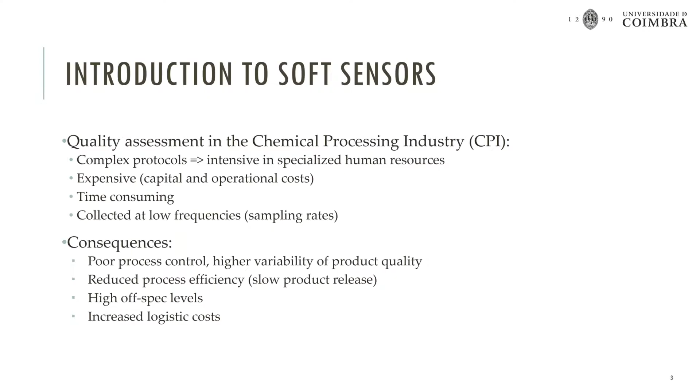You have, of course, a higher risk to have off-spec products, and there is also sometimes a hidden logistic cost that is tremendous, because until you know what to do with your streams, you have to put them in very, very large vessels, and that is something that costs a lot of money. And also you have to have those vessels, which is really very costly. So there are all the motivations to make these measurements available as much as possible in real time.

So what you do is to build models to predict those variables. And these models in the end are implemented in pieces of software or code, so they call them soft sensors. It's not really a physical sensor, it's a model implemented in software. So you can build a model like that using first principles, or mechanistic models, as we can also call them, or you can use the data that you have, and they are data driven. Or, and today this is becoming more and more used, you can use all the things that you can bring to the model, and you have a hybrid approach, first principles and data driven all together.

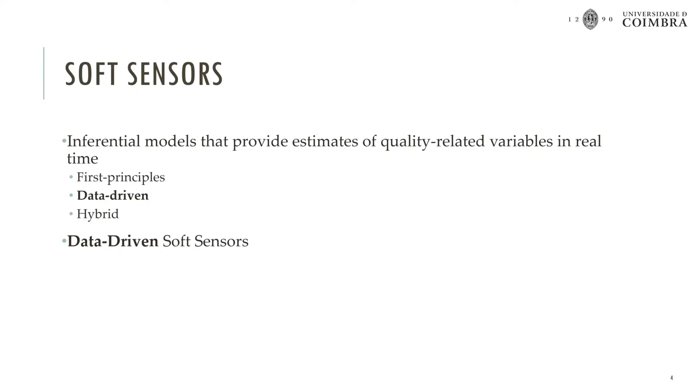So in this talk, we are going to address mostly the data-driven soft sensors. But even in the data-driven soft sensors, you can have different categories. And most often, you are probably using just industrial data that you can quickly grab from your databases, like the sensors for pressure, temperature, flow rates. They are quite easy to collect. Even measurements like pH and conductivity and others that nowadays are also quite handy. So one type of soft sensor is to build models from this easily obtainable data in order to predict your response, your property of interest.

Other types of soft sensors start not from the data that is already available, but from data that can be collected using specific technological instrumentation like NIR, Raman, and other types of technologies.

We call it in general process analytical technologies. And to use that data, those spectra that you collect from these devices, to build the sensors that you need to predict your properties. So these are like another type of sensor, but usually you need technology for that, but we also need a very good model in order to correlate the outputs from the technology with your desired output, which is your quality response.

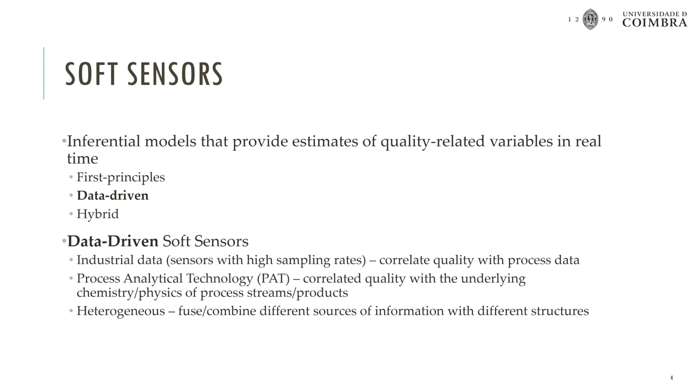And I will also address ways of combining both types of soft sensors. So the goal is to present case studies, real case studies, where you can put forward these 3 different ways of building soft sensors. And in the meantime, I will try to bring some relevant aspects that you have to take into account while you are addressing each type of soft sensors.

And hopefully, in the end, I will also give you some feedback on things that are currently being considered as interesting topics for research. Some of them are still open, but for sure, I think they will deserve more efforts in the future in order to be properly addressed.

So the first case study regards industrial soft sensors, and by this I mean using data that is readily available from the database. So here we want to predict RON in a reforming unit. So RON is the research octane number. I'll in a minute say what it is more specifically.

But a reforming unit is basically one part of a big refinery where you convert the naphtha into something with more value. Basically naphtha is composed by linear paraffinic hydrocarbons, and they don't burn too well in the motor. So what you want to do is to put more branched hydrocarbons there, and also some more aromatics. And you can do that in this unit, the reforming unit.

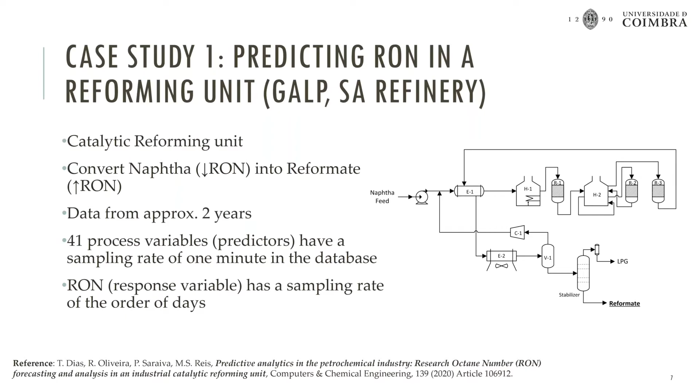So in this process, we analyze 41 variables, just process variables, over almost 2 years of production. And RON is measured following the usual standards, the ASTM standards, using a combustion fuel research engine that is calibrated. But this is really a complex way of measuring the properties, and so this is only done a few times per week. So this is, as you can imagine, a massive facility, but the outputs are not all available with the frequency that we would like. So there is a big driver for having this property being estimated.

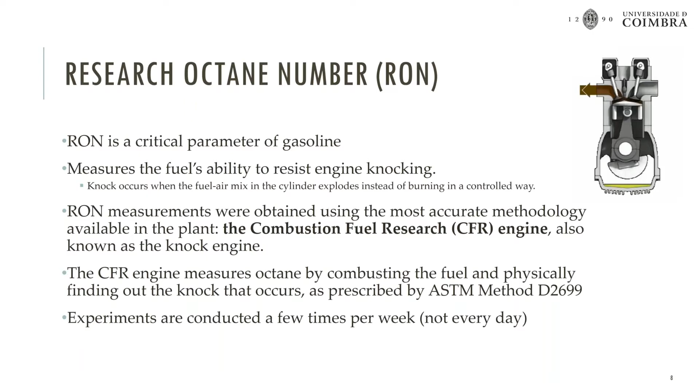So what we have done is we have collected data. As you can imagine, in process data, you have to do a lot of preprocessing. You have to remove all the periods where the process was down. There are a lot of outliers that are nonsense, and you have to filter them out, because it's just things that happen in the sensors locally. And you also have to be careful, because you don't want to remove others that look like those and are really not outliers or faulty.

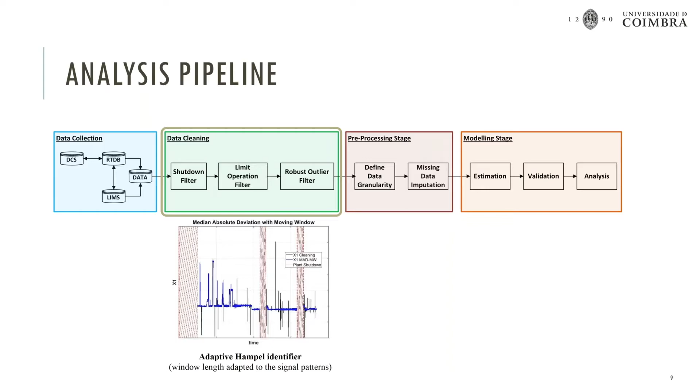So you have to tune these filtering operations very well, and you should not rely on blind ways of removing outliers, because you might be throwing away also very useful information. So we use here banks of adaptive filters, and then we always visually confirm that they were doing what they should. Another preprocessing stage that is important is where you define your granularity, because most of the times the data doesn't have the granularity that you need for your purpose.

So if you use here the Ron Kenett and Shmueli approach of InfoQ, what you want in the end is to generate as much quality of information as possible. And that means that you have to get the correct data, apply the correct algorithm, given the goal. And here our goal, I didn't mention that before, was we want to study the catalyst deactivation over time. And that might take years.

So for this particular goal, being able to predict RON on a daily basis is more than enough. So we set the resolution to the day. And that's always goal dependent. For other purposes, we might use a different resolution. But for our goal, the daily resolution was enough.

And of course, you also still have some missing data to handle. And here, for missing data, you usually resort to methods that explore some sort of redundancy in your data sets, either in the variables or in the time. And in this case, there is a lot of autocorrelation, because these are really massive units and you are sampling them so fast. So we mostly do interpolation here to fill out the missing data that we need to build a more stable model. And that usually takes a lot of time, and the 80% of time principle also applies here.

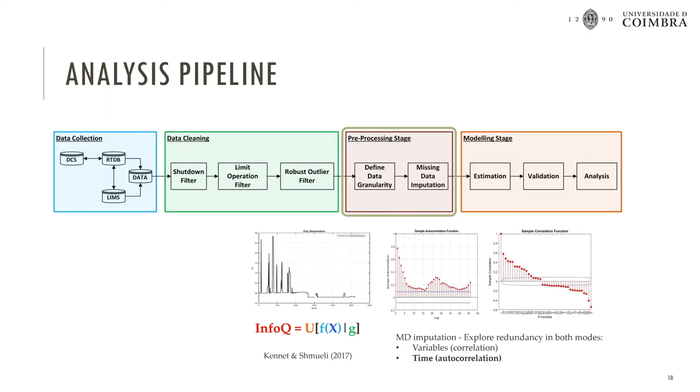But most of the time when you talk about soft sensors, you just focus on the modeling stage. That's what is now being discussed. And when you get to the modeling stage, quite often people apply their favorite predictive methods, or sometimes they have a favorite set of tools that they apply here. And what we have been learning is that we should be agnostic when we really don't have much information about which models to apply.

So what we have done here was to develop a tool that explores different corners of the analytics domain. So we assemble a selection of different categories of methods, including variable selection methods, penalized regression methods like lasso, elastic net, ridge regression, latent variable methods like PCR, PLS, and also tree-based ensemble methods, like random forest, boosting, bagging. The first three categories are mostly for linear processes, and the fourth one addresses nonlinear processes. And this will also be our way of knowing if some nonlinearity is present, because if it is, then we should bring in more nonlinear methods that are not here.

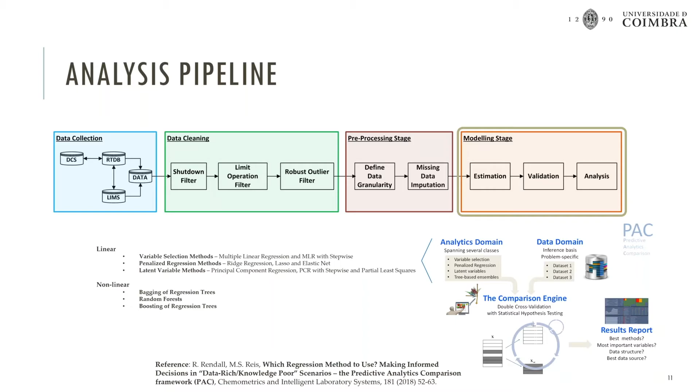So we built a framework that basically compares all these methods with the data sets that we provided, and we use a double cross-validation approach that was robust enough, and then we analyze all the results and compare them. And in this case, what we got was that the tree ensemble methods were clearly the best. We were not foreseeing that, because we thought linear methods would perform better, since this was supposed to be well controlled, and it is well controlled, but still there is some nonlinearity there. And you can see that we can achieve prediction accuracies of the order of 0.4.

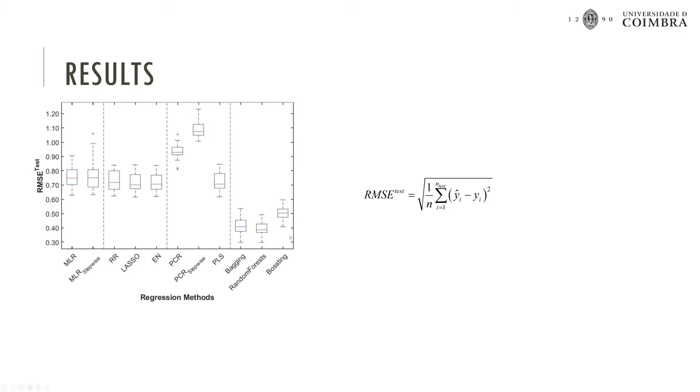And the kind of methods that we apply allow us to see which method performs better. In this case, it was random forest. And there are reasons for that, but I will not have time to cover it here. So basically, we can predict with a 0.4 accuracy, which when we compare with the literature is well placed, but not the state of the art. There is one that could be better than ours, but that used much less data than we did, so I don't know if it is really comparable. But this is fine for the purposes of studying the activation process over years. And the 0.92 R square on prediction is not bad at all for this kind of application in industry.

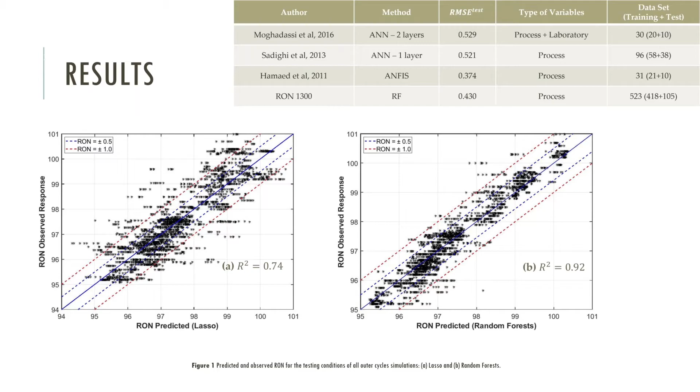Okay, so one thing we can also do with these soft sensors is look at the variables and see which are the most important or not, and try to pull some information from that. We'll not cover this here, but clearly the pressure and the reactor variables are the more important ones, and that is not a surprise, but then we have to know which reactor variables are playing a role, and that might be something interesting. So this is one type of sensors, the sensors based on process data.

So let's now address the PAT soft sensors, the Process Analytical Technology soft sensors. And here, what you want to do is pick a sample from the stream whose properties you want to estimate, and you go and measure what you want in the labs. So this is the complex, time-consuming measurement.

But in this approach, you are going to explore the connection between the chemistry in the stream and your property. If you also can connect and relate that chemistry with some measurement from a device, then you can correlate that measurement with the property immediately.

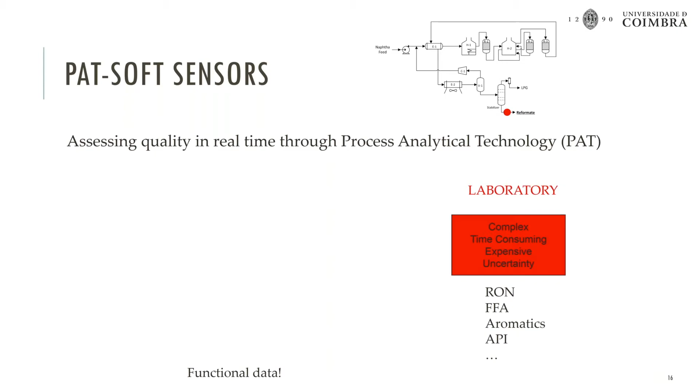So here we are going to use spectroscopic measurements. Spectroscopic measurements are basically measurements that are very sensitive to detect changes in the light absorption in certain frequency bands. So that has to do with the chemistry. So if you can find a measurement, NIR, FTIR, NMR, something that correlates with the chemistry of your stream, and that particular chemistry of your stream is also correlated with your property, then you can build an inferential model and use this easy, fast, and inexpensive measurement to predict your property.

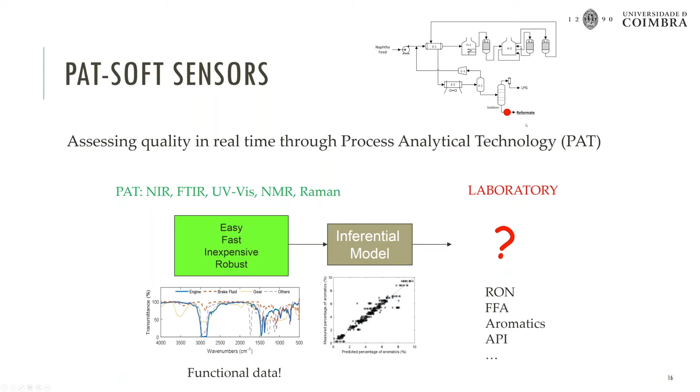That's basically what you want to do here. You don't want to use all the other variables, but just a sample that you take there and inject into one of these technologies, the one that fits your purposes better, and then you use it to predict your response. So here your inputs are something like this. So basically they are functionals. So now, yes, now we are in the realm of functional analysis, but that is something that is only recently being brought to this field. And usually we use latent variable methods to address this.

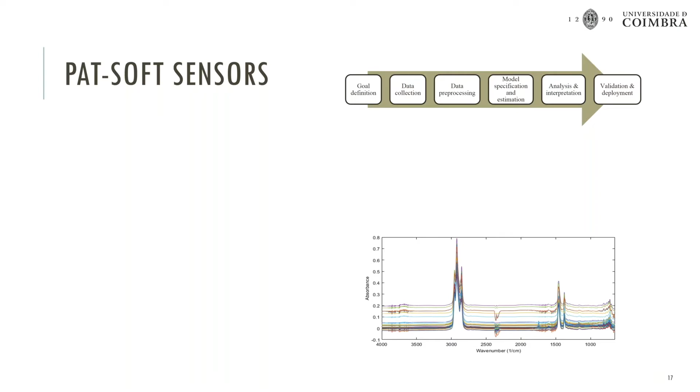And what I want to bring here is that what is very, very important is the preprocessing that you do with your spectra. So you have to do a lot of preprocessing to remove noise, but also to remove undesirable effects. For instance, these different levels are meaningless. They should be the same. They just happen because there are effects like light scattering that are making this happen. So if you apply in this case, for instance, the first derivative, this will be gone. So you should do this type of data processing here. And we also should do preprocessing to bring out the features that you really want for predicting your response.

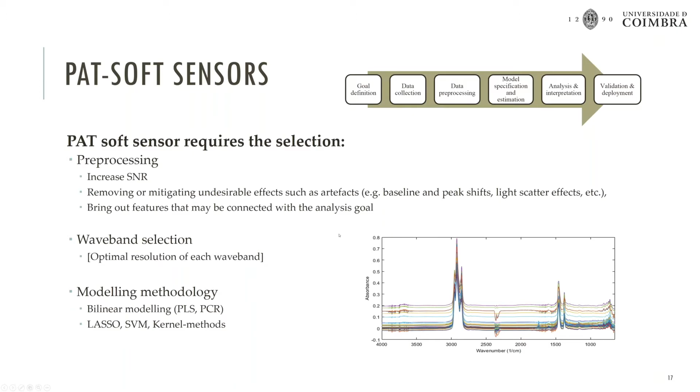So we have to test different preprocessing, and we also have to select the most meaningful bands, because if you just have bands that are not related to the response, they will hurt your model. So you have to do band selection. And you might try different modeling procedures also. So there are all sorts of different problems that you have to address in this case in order to develop a better model. So I don't have time to go into too much detail, but here we also developed a framework that allows us to speed up this process.

You can have different types of models, for instance, partial least squares, which is a sort of gold standard for developing this type of PAT-based soft sensors. But you can also use some other PLS-based approaches, like forward interval and backward interval partial least squares, that allow you to select the bands simultaneously with the model building, which is nice. And we have developed another method, which we call multi-resolution soft sensors, that allows you to select the bands and also to optimize the resolution within each band.

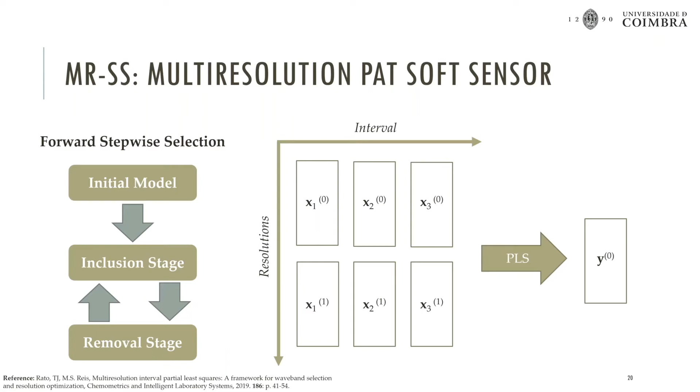And our framework tests all these methods with different sorts of preprocessing. And this is basically the multi-resolution soft sensor. So it tests all these methods with different types of preprocessing. And again, we're using double cross-validation. What we also do here is we test all of them in an independent test set. And we also do replications in the test set, because you want to know how they behave, not in a single test set, but in a test set with some variability.

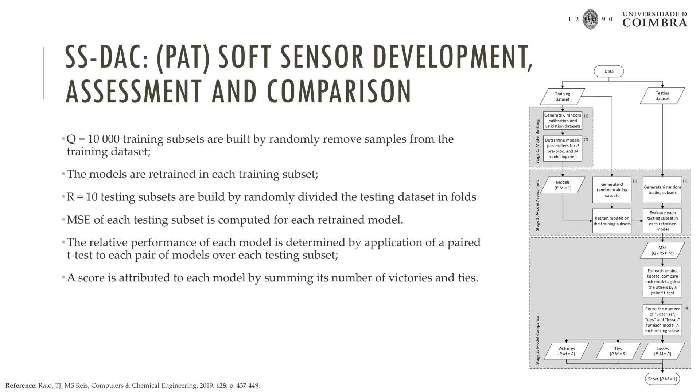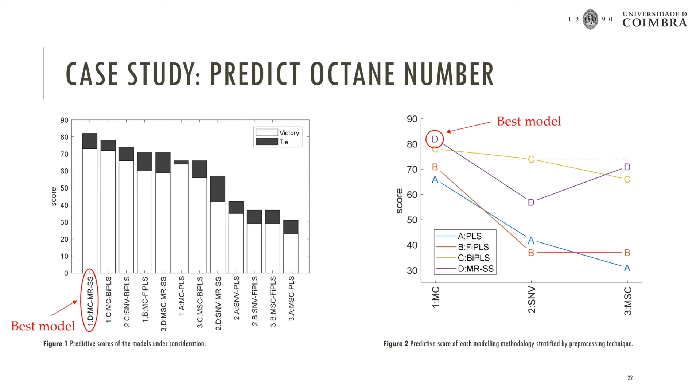But let me just go back here, so that you can see one interesting thing about this model. So now we are also predicting the RON number. It's not the same process, it came from another process. But look here, now the root mean square is 0.05. If you recall, with the process data, it was 0.4. And now it will be 0.04. So now we can be 10 times more accurate with this sort of technology than with just the process data.

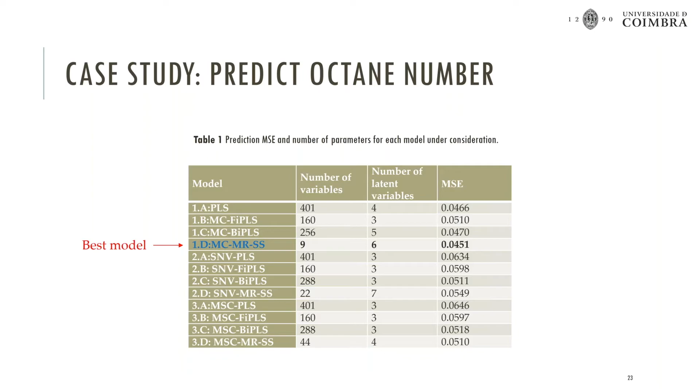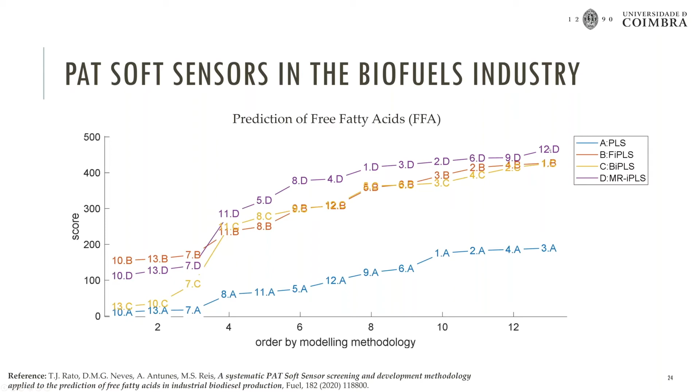One thing you would also like to see is, in the end, go back and make the plots and see which bands are being picked for the model. That also may tell you something about the chemistry and what is important for the property that you want to optimize. And those are also some interesting insights that you can get from here.

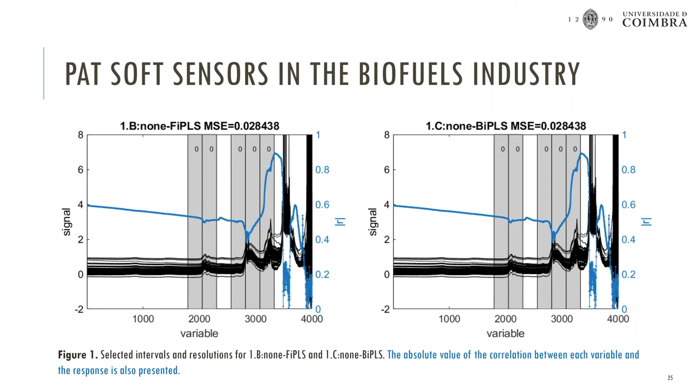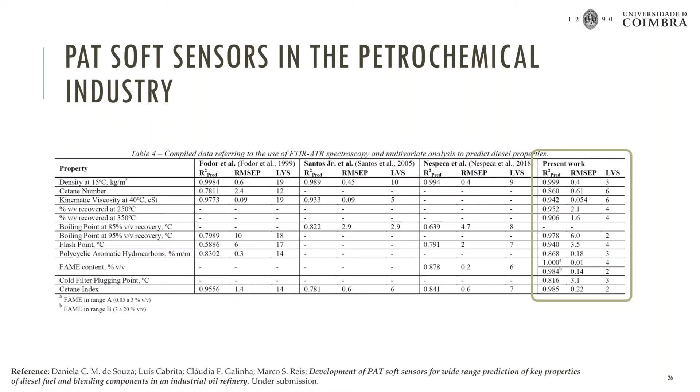Okay, so we have also used this sort of technology to go back and see if we can reduce the effort in the labs for making those complex measurements, because for some of the properties we can achieve error rates that meet the standards. So that means that we can now lead the company to also save some money on this without hurting any sort of accuracy in the predictions, and they can save money and have more frequent measurements actually, which is also interesting for the company.

So finally, what if you have both types of methods available? So in this case study, we do have an online analyzer, as I just described, a PAT analyzer. I have a lab analyzer, which is a gas chromatography analyzer, every 12 hours. And we also have a model, a soft sensor, that is based on process data. So how can we combine all these different approaches?

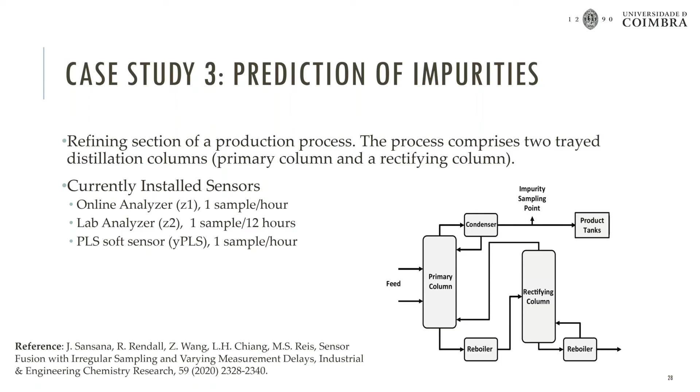So a usual candidate is, let's go for a multi-block approach. Multi-block approach is something that we can do. We compartment the different measurements in different blocks, and we handle them simultaneously, providing more or less weight to each block, and we can build a multi-block regression model like that. But here they have different sampling rates, and that makes everything more complicated. So the way we addressed this here was with data fusion technologies.

So one approach would be to use the tracked Bayesian fusion scheme, which is quite simple. You just put your model from the process variables in the Kalman filter, and your online analyzer or your offline or lab analyzer in parallel as the measurements. And you can do some Bayesian fusion when you have both, or just use it when you have a single one, and then use them in the update. And then you apply the Kalman filter as usual.

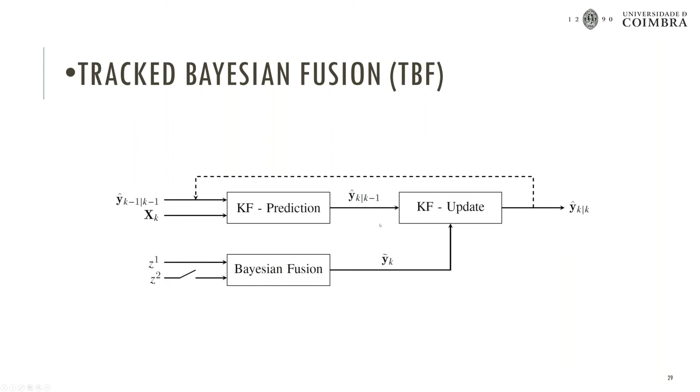We have also tried out other different approaches of combining these measurements. So we have tried out using in parallel two Kalman filters, a bank of Kalman filters. And what you fuse is the estimates of both Kalman filters, which go back again, and they enter the Kalman filter in the next stage. So there we have been learning that there are different ways of fusing, and the best way of doing data fusion is always case dependent and depends on what you want to combine, the uncertainty that you want to combine, and also the frequency with which the data from each source is available.

So in this case, the method that we proposed was this one that also allowed us to take into account some bias in one of the sensors, which is the online analyzer, which is not that accurate in this case. And if you correct for some bias, you can make it a lot better. So the kind of results that you get with this approach is something like this.

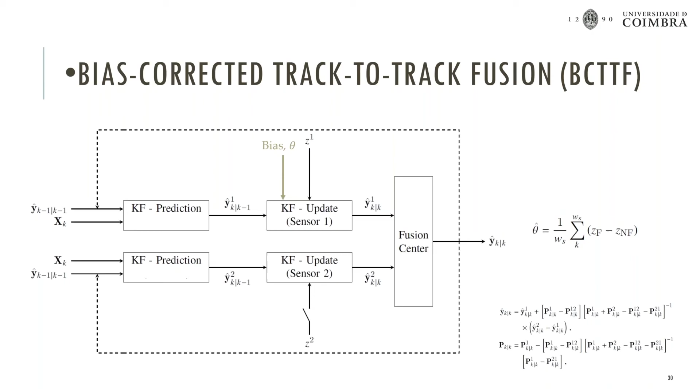So just to close, I just want to bring some challenges that we are now working on. So we are working on bringing mechanistic and data-driven modeling all together. We call it hybrid modeling. Also, the multi-resolution modeling is important. We usually take for granted that the time that we have is the only one that we should work with, the time resolution. But we have been learning that if you tune your resolution, you can greatly improve your accuracy, either in time or in wavelengths. This always brings better results in our experience.